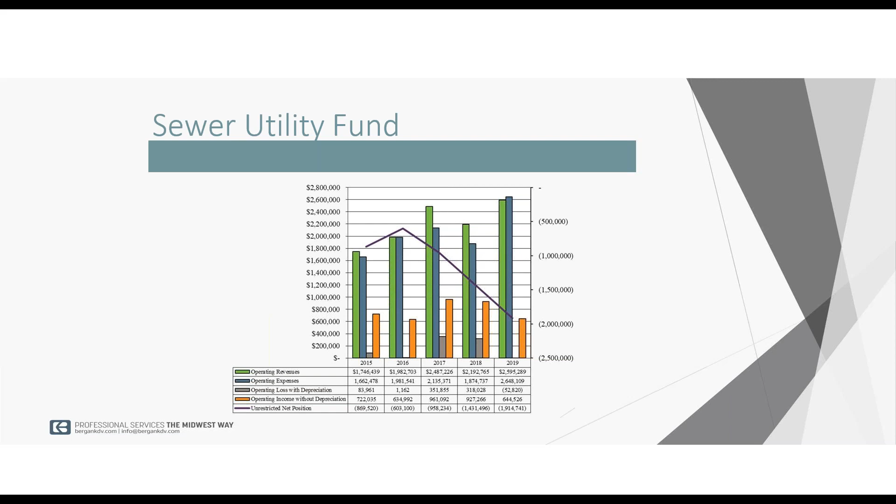And again, not raising the alarm bells or anything like that at this point, but just want you to be conscious of the fact that if that is going to be a significant resource for your general fund in future years, we want to make sure the health of this fund is sufficient to provide that resource for you moving forward.

And then finally, to wrap things up, do we have one other? No, that's it. That was the last of the utility funds that we wanted to cover. So again, I appreciate the opportunity to work with the city.

I know you're in very good hands with Zach and his team. We had a very good conversation with both Jasper and Zach a week or two ago and shared some of our thoughts a little bit more in depth. We've covered 5 or 6 of the city's funds here tonight.

There's about 20 or 30 of them that are out there, and we've had good discussions on a lot of those last week. Again, appreciate the opportunity to give you our perspective and appreciate taking our message to the PBC committee to kind of plot strategy for future years. Be happy to stay on the line if you have some questions about the city's finances or the audit results or anything that I didn't cover in the actual presentation.

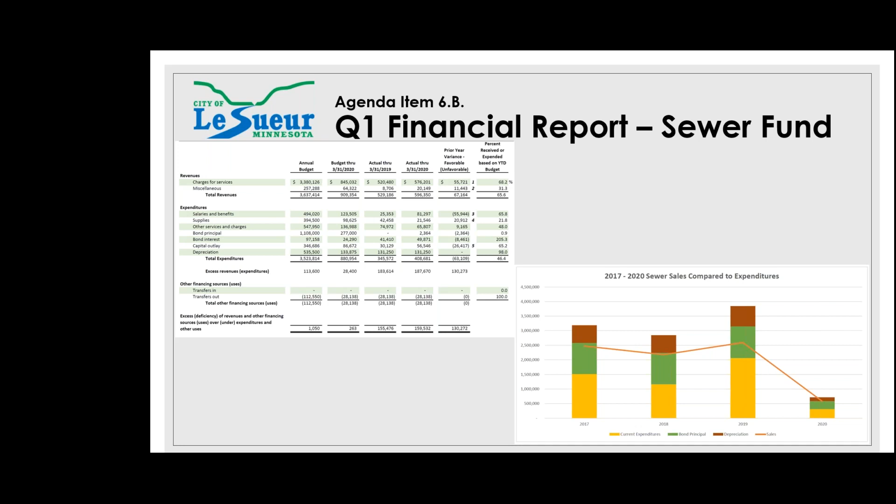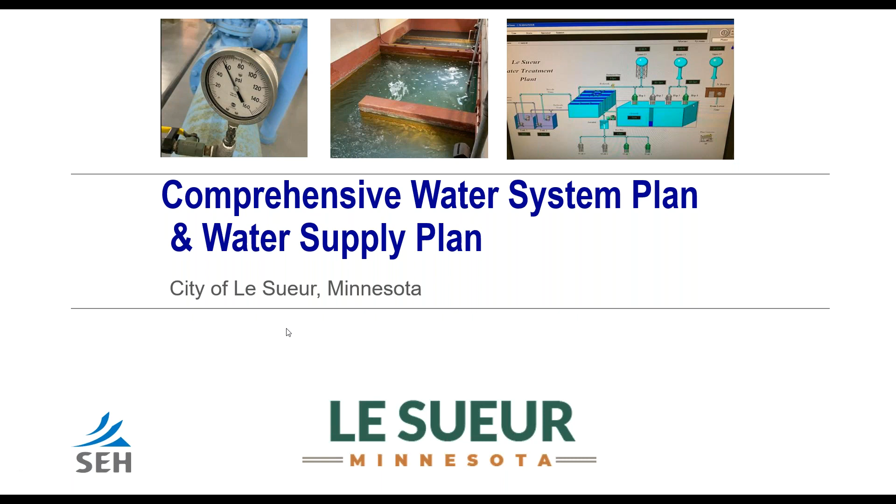Welcome, Mr. Katzenberger. Thank you, Mr. Mayor and council, happy to be here. Thanks for the opportunity to present this report and make this presentation. As you noted, the report itself is quite lengthy, so I tried to boil it down and give you the high points in this presentation, and I'll try to keep it moving along so we can get through it in decent time.

This water system plan was put together for a couple different reasons. Number one, the DNR requires municipalities every 10 years to create a water supply plan and emergency response plan, so part of that was populating a report templated by the DNR. And then, to a greater extent, we've developed a new comprehensive water plan for the city that takes a more holistic look at the overall system, what you're going to need for future water supply, treatment, system redundancies, and all those sorts of things so you can better plan in the future.

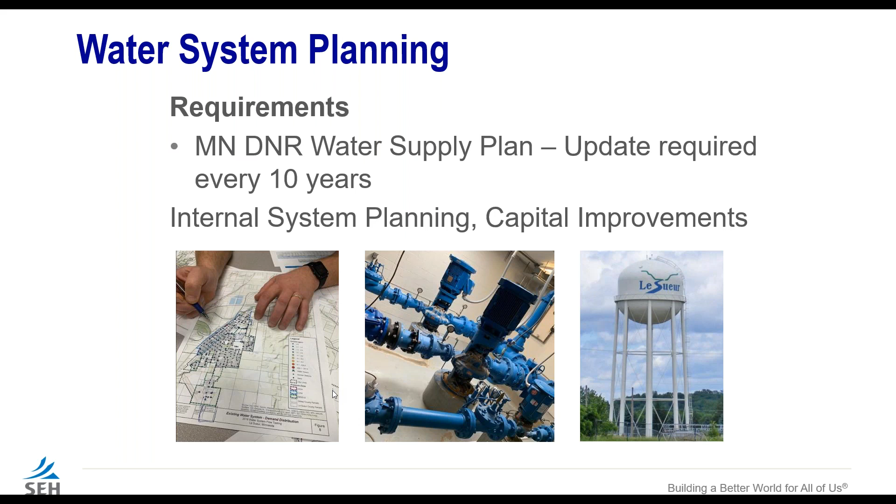What I'd like to review tonight is a few things: purpose of the plan, a look back at historical studies, your current water use trends, your future water system needs, how we came up with those needs through water model development and analysis, and most importantly, what those overall needs look like and what the recommended improvements look like from a future improvement standpoint.

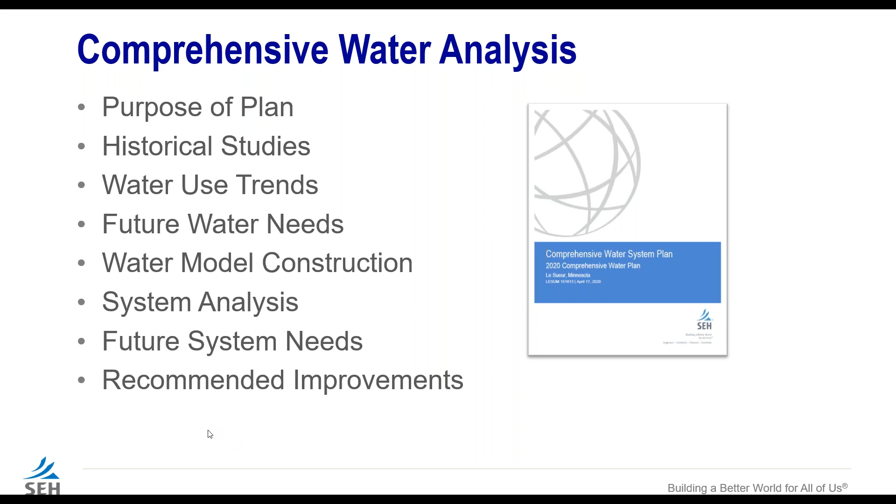We take a step back and look at lots of data, whatever we can get our hands on - previous studies, all the great data your city staff collects - and bring it all together to look at the whole water system from a holistic perspective. As we work through that, we're building upon previous plans and efforts, optimizing and focusing on how the system should change to meet your future needs, both from an existing customer viewpoint and to accommodate additional growth.

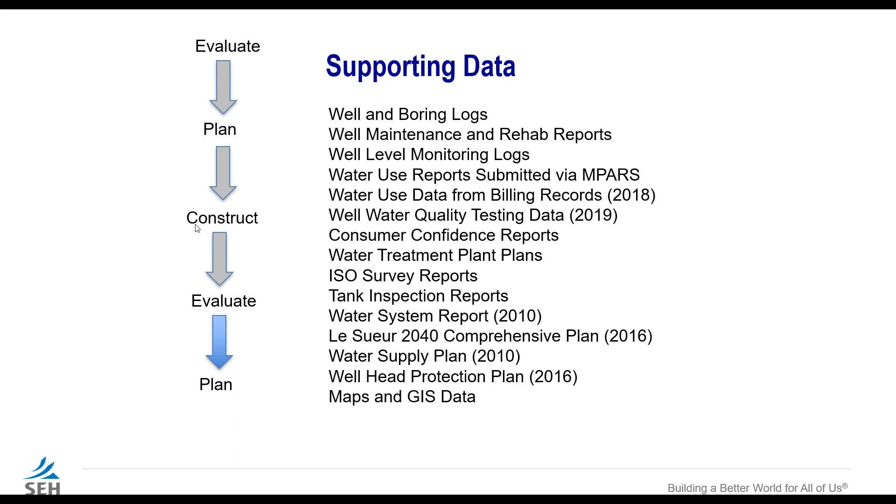We take a look at every aspect of your water system. We start with supply and treatment - how much water do you need to supply both now and in the future to meet your peak days? Storage for emergency supply and fire protection. And then, of course, distribution and transfer - how are you going to deliver water to your customers? Where are the weak points, including from a fire protection perspective?

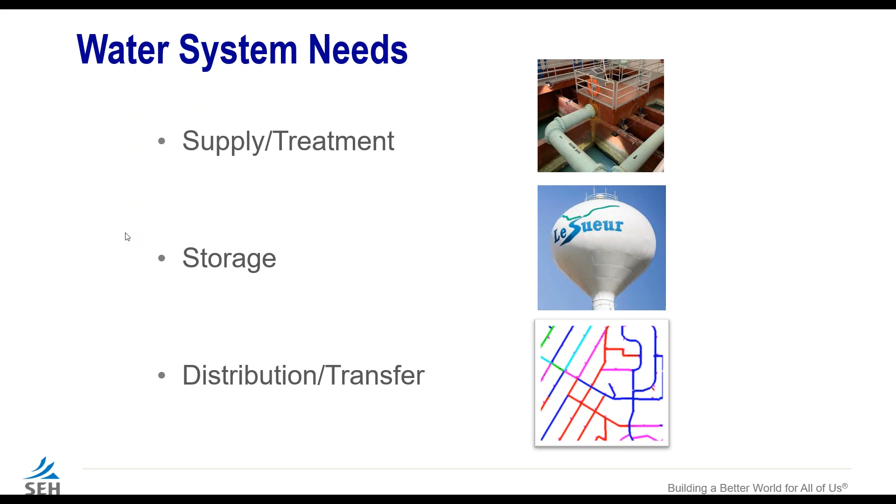Just a quick overview of your water system. Water is supplied through four primary wells - two somewhat shallower wells that tend to be a little more potentially vulnerable to outside contaminants, and two deep wells, which are your big producers and are well protected with lots of confining layers. All four pump to your water treatment plant.

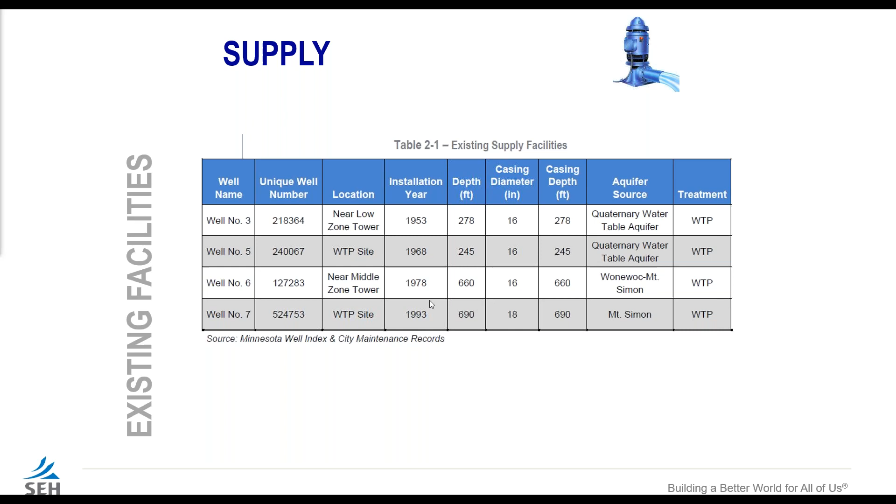The water quality from your water supply wells is generally good. The main issue at hand is levels of iron and manganese in the water, and that's the main purpose of the water treatment plant - to remove that iron and manganese.

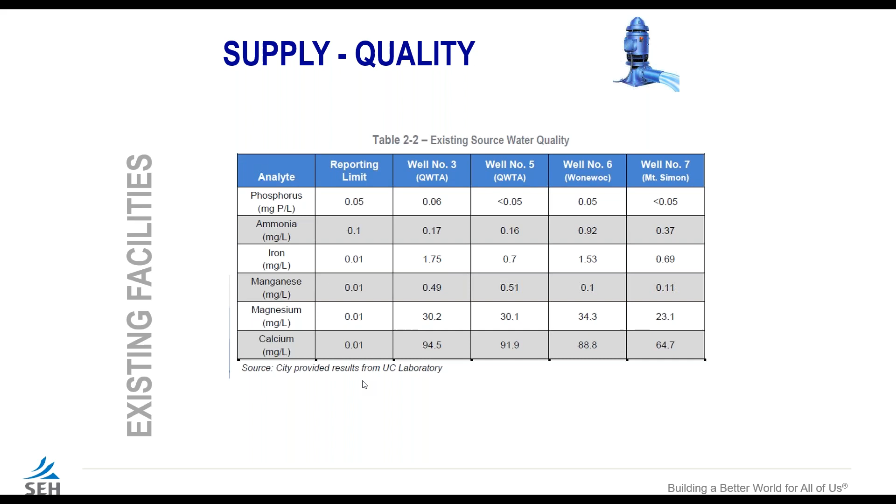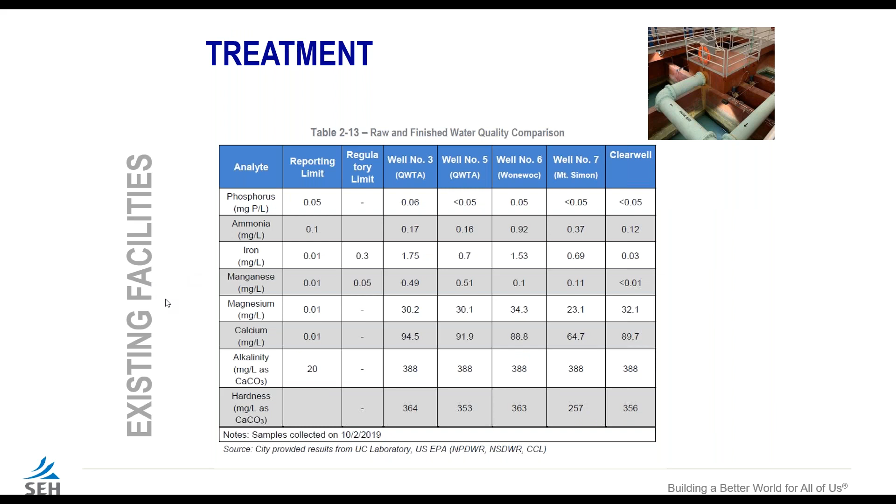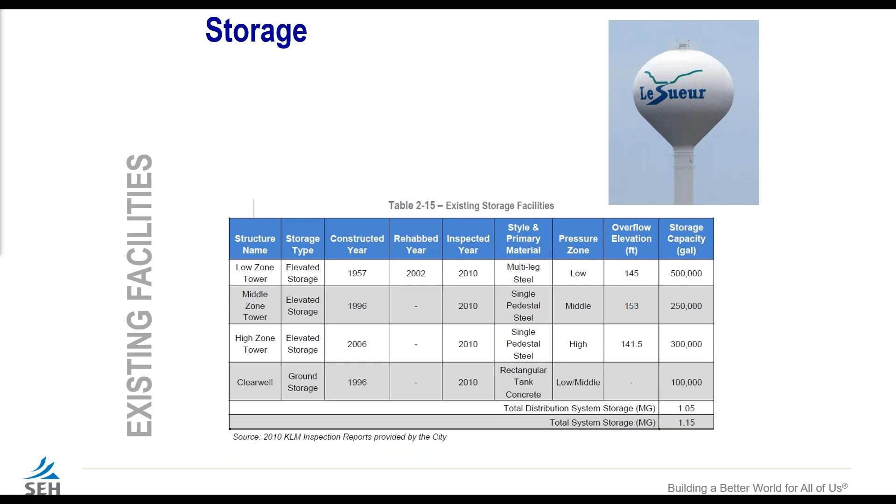From a water storage perspective, of course, the most visible piece of your water system is your water towers. There are three elevated tanks, one for each pressure zone, which serve to provide emergency reserve and also sustain system pressures for the various elevations throughout town. And your distribution system has just over 36 miles of piping, which delivers water to your customers and supports fire protection.

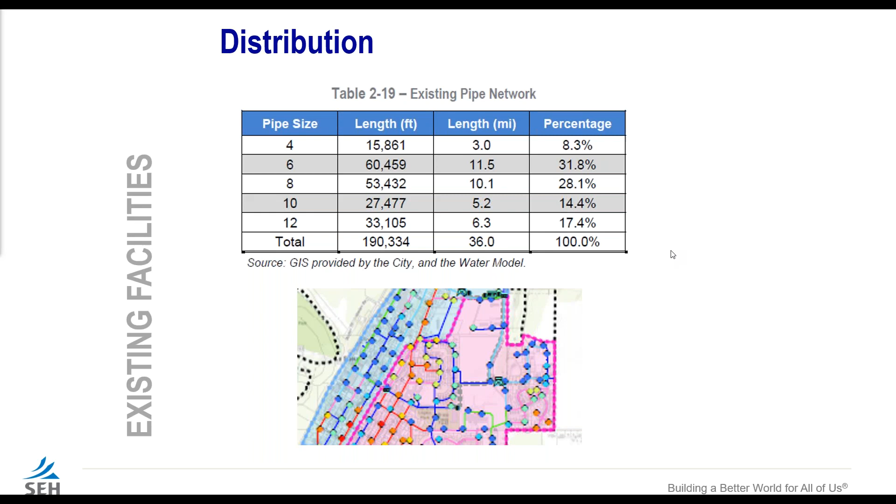This is a review of your pressure zones. These are served by each of the three water towers, really based on land elevation. As you rise in elevation from the river bottom, each water tower that serves a particular area needs to be a little bit higher in elevation in order to support system pressures in those particular areas. So that's really driven by elevation and geography.

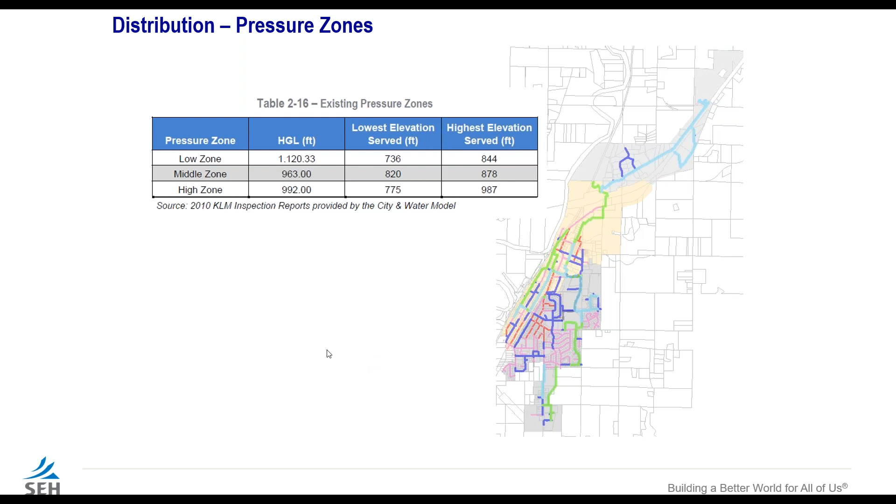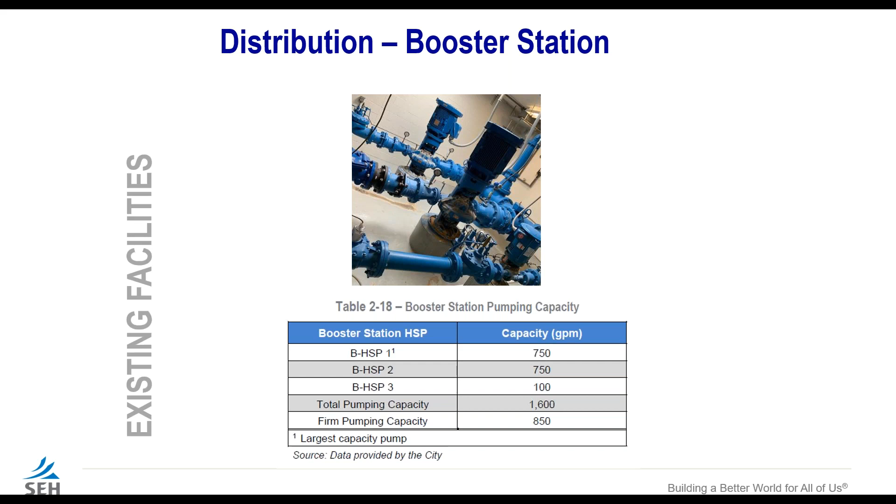One booster station currently exists in your distribution system, and the primary purpose of that booster station or pump station is simply to move water from your low pressure zone to your high pressure zone, whereas the other two pressure zones - the low and the middle zone - receive water directly from your water treatment plant via the high service pumps.

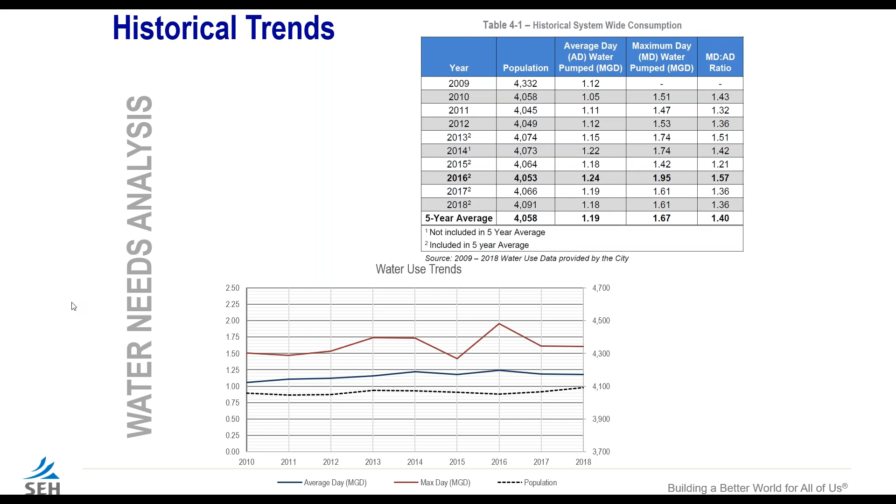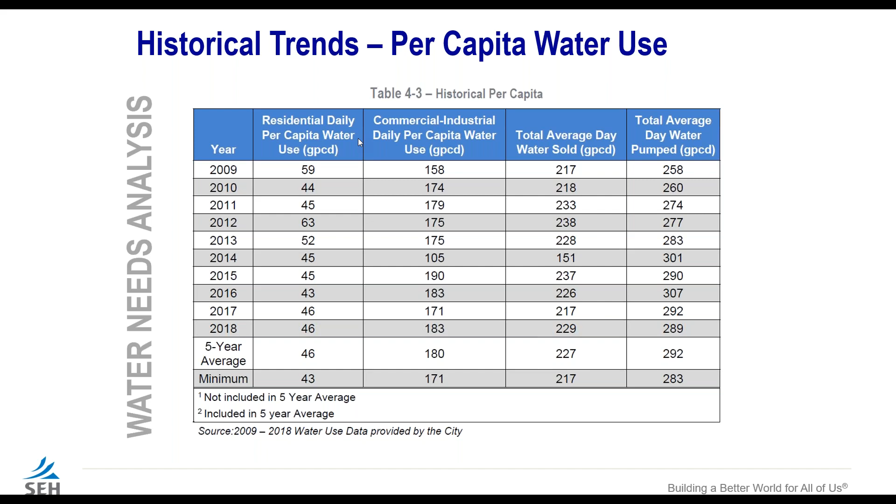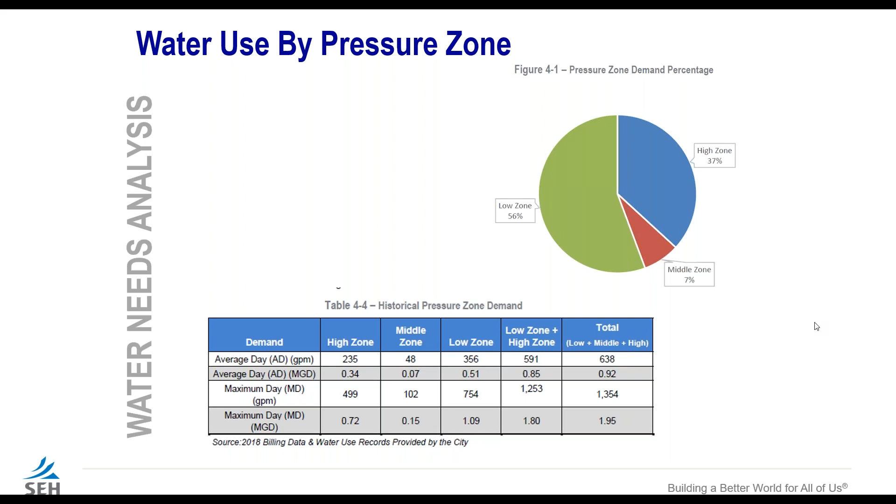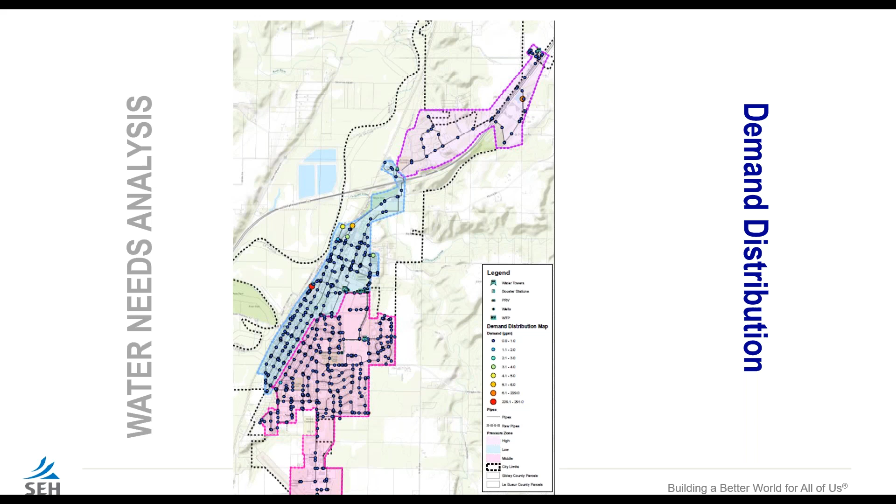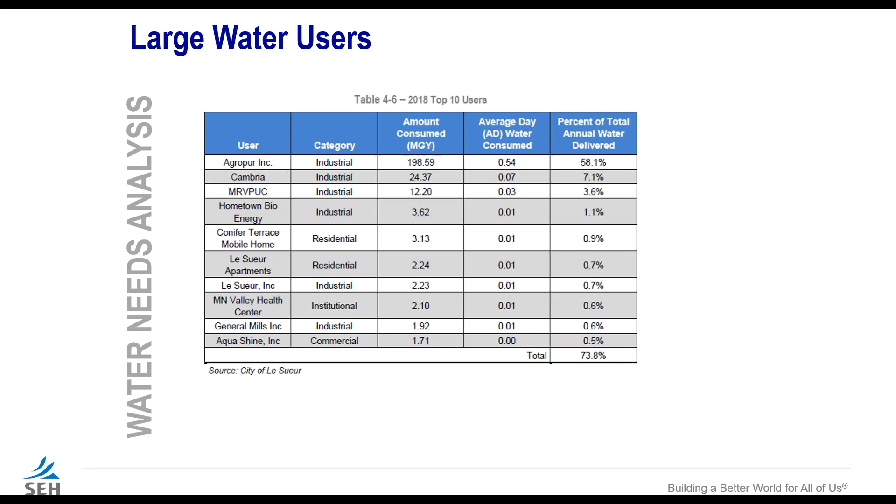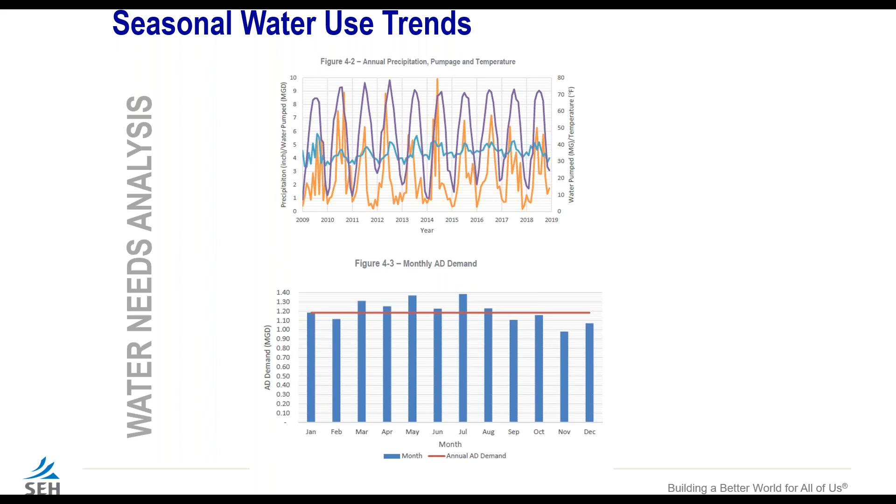Generally speaking, we look at this as having somewhat of an effect on your potential max day water use. Next slide.

We take what we learned from the historical water use analysis and population, and now we project that information out so we can get a feel for what we might expect for future water demands, both from an average daily and a max daily perspective. Now this is based on population, and why we do that is we don't have a crystal ball. We don't know exactly what's going to happen in terms of the change in user types, but we need to have a target or a guideline to shoot for. So we take your overall per capita water use from both the residential and commercial perspective and apply that to your future population projections so we can get a good feel of what's a reasonable amount of growth.

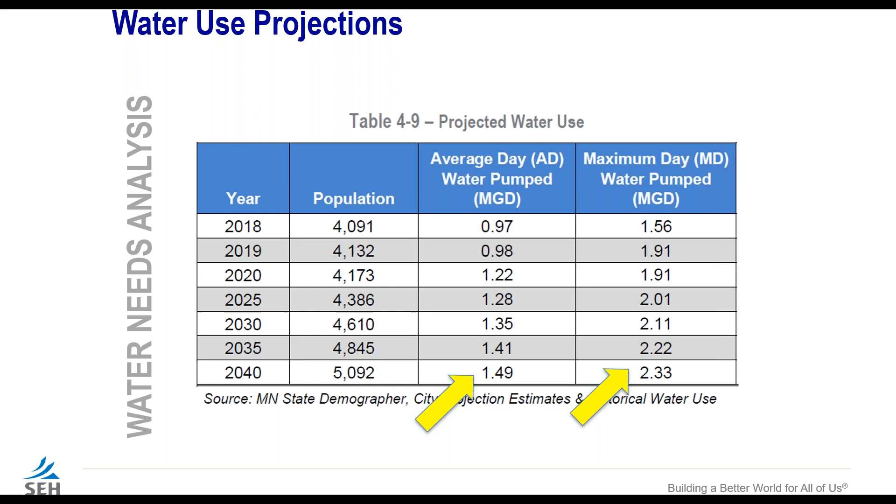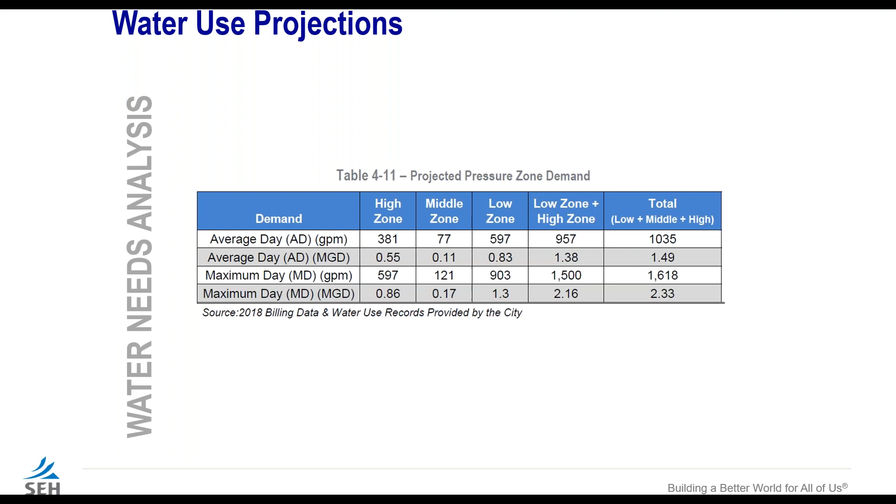All right. Next slide. This is just a quick breakdown of how that pans out by our pressure zones, and this really comes into play when we look at things like water storage on a zone-by-zone basis and high service pumping into each pressure zone. Next slide.

So now that we have something to shoot for in terms of potential water system demand, we can take a look at what our current needs and projected needs are. Our demand-driven things are things like supply and treatment, storage, and system pumping. We also developed a water system model, which simulates the operation of your entire water system, so we can look at how things are currently performing and how things may need to change from a supply, treatment, storage, and system pumping operations perspective. The big thing the model helps with is transmission and distribution, understanding potential weaknesses throughout the distribution grid.

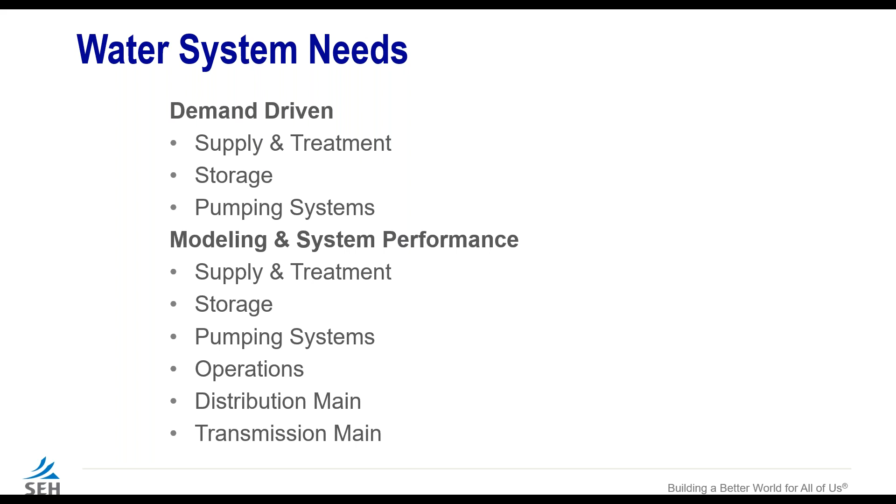We can go on next slide.

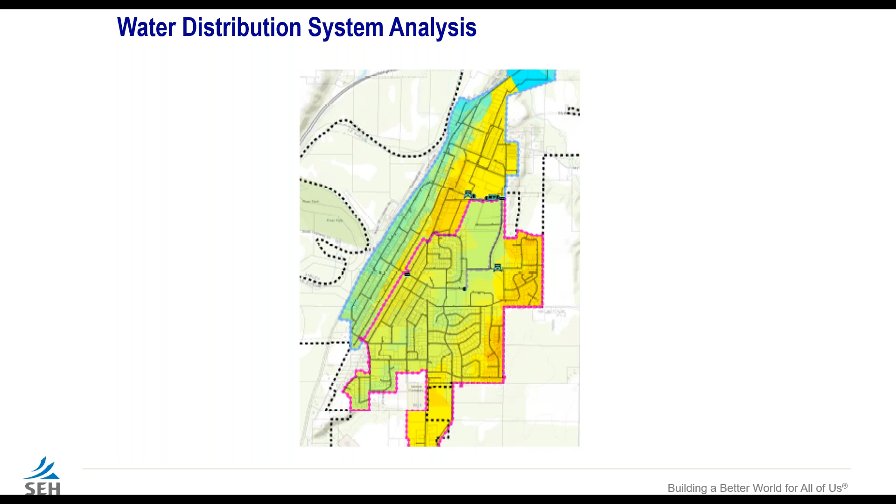As we developed our distribution and holistic water system analysis, we developed a computerized water model where we take your existing water system mapping, piping, those sorts of things, and bring it into the modeling environment. We go on and do some field testing, bringing back information throughout your distribution system so we can understand what your system can do in terms of flow performance and pressure performance, and correlate that in the model. Then we simulate those same tests in the model and calibrate it so our results match our field results.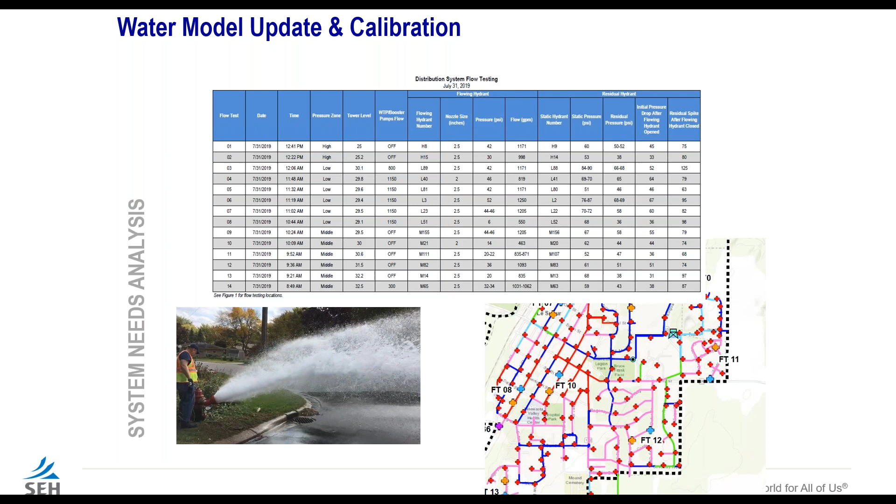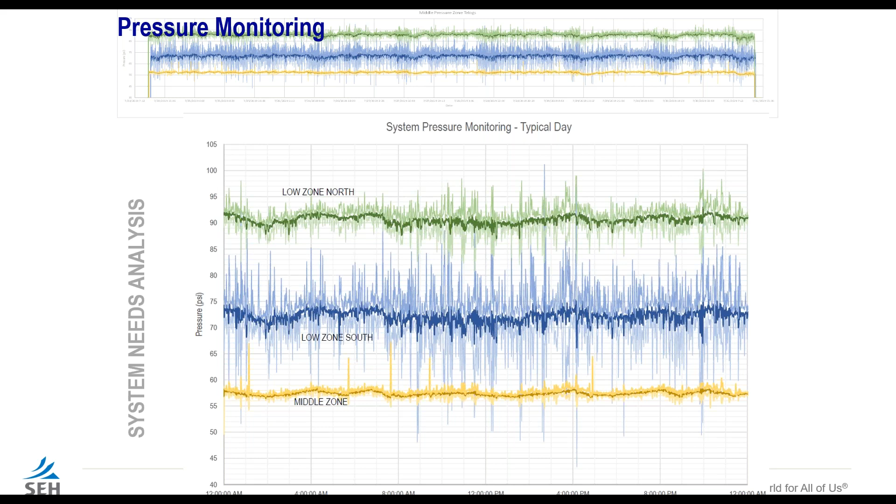And I'll have to apologize here - my computer went to sleep on me. I've got to see where I'm at on the slideshow here.

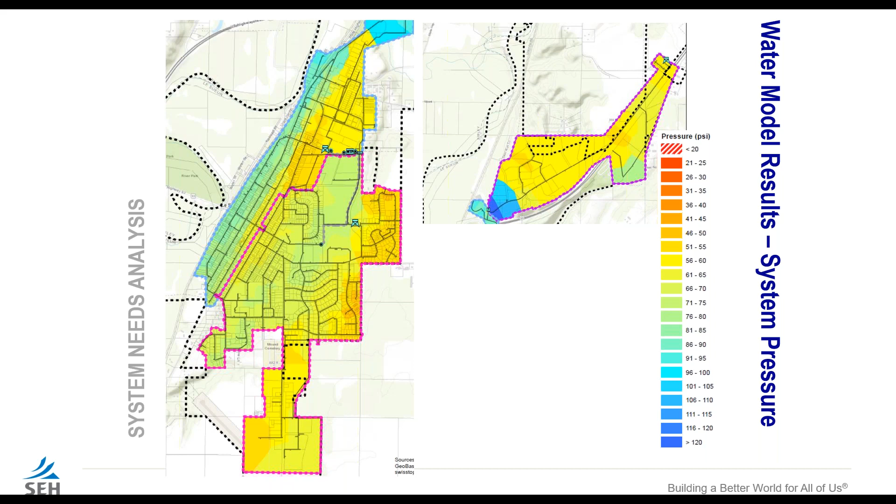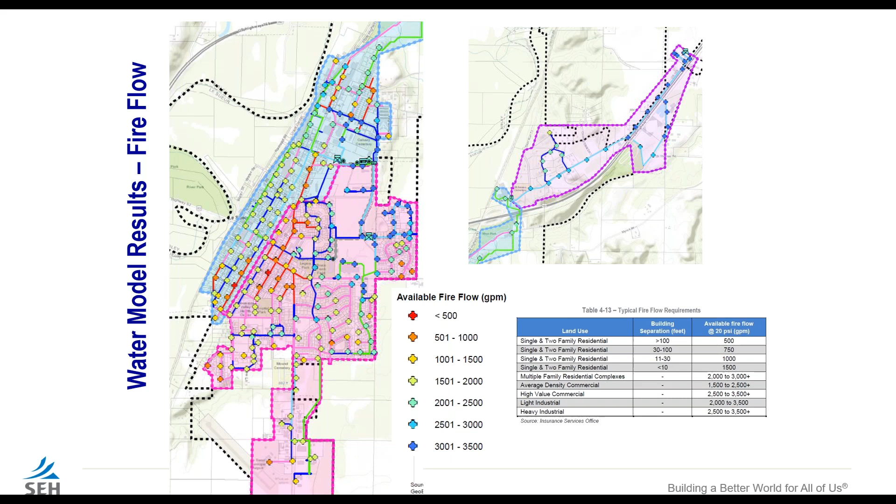This grades your water system based on fire flow ability among other things. This gives us an idea of where there's some weaknesses in the distribution system, where things could be improved from a pipe size perspective, as well as some redundancy between pressure zones. That will come into play in our future recommendations, and some of those have already been implemented with the Trunk Highway 112 turnback project, right-sizing some piping along that improvement to bolster the fire flows and provide some redundancy. Let's go to the next slide.

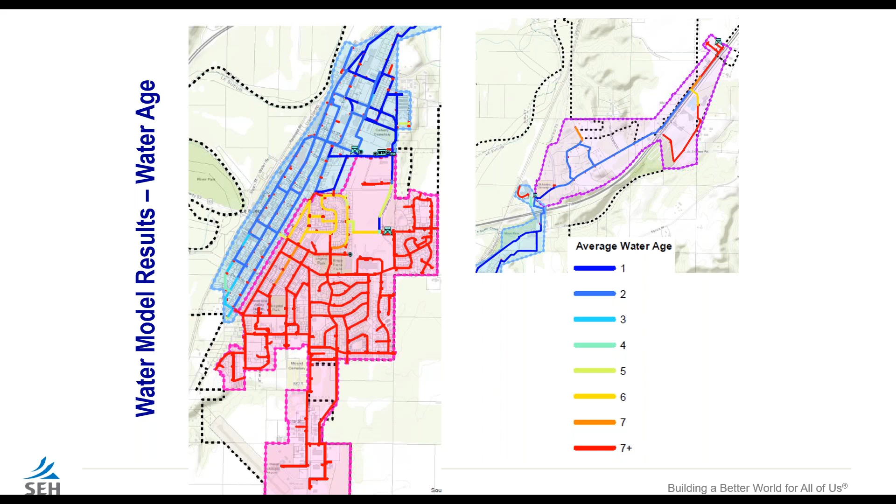You'll notice a lot of red piping in the middle zone, and that's really a product of that being a lower use water pressure zone. So just the amount of piping versus how much we use in that zone, it's going to take longer for water to go from A to B, because not that much is being consumed compared to the other two zones. Let's go to the next slide.

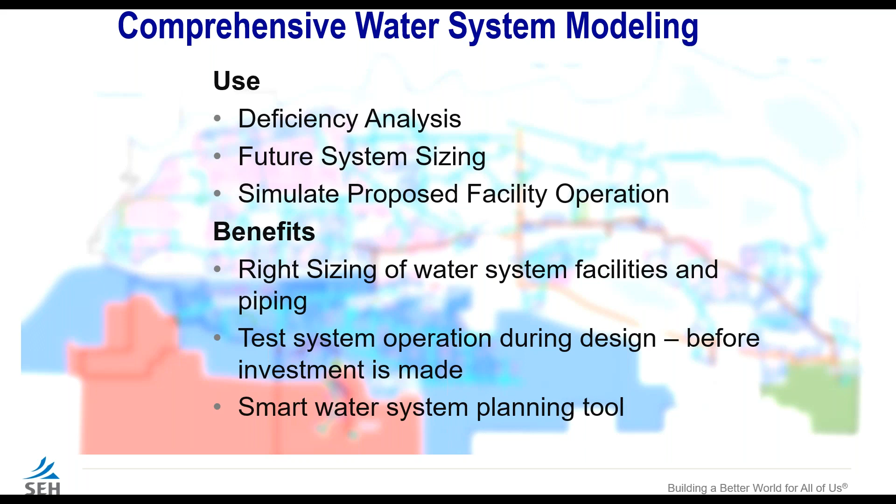When we look at the modeling, we use it for deficiency analysis, finding weak points in the system, sizing future facilities, and then we can simulate proposed facility operation and make sure that what we're recommending is actually going to work and provide the benefit that you're looking for before you make the investment. We can test your system as a before and after operation with each improvement. We can go on to the next slide.

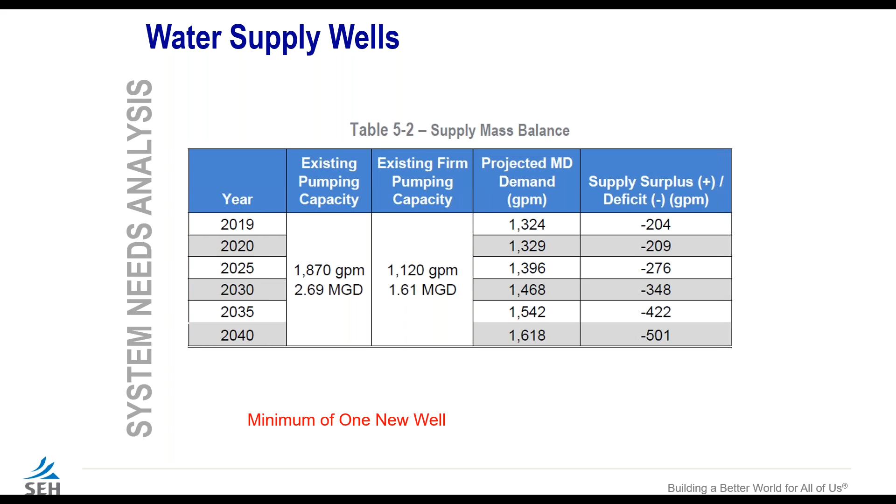Let's say this July, if your largest well were to go down and you had a massive day of water use, your storage might start to get depleted because you can't make up that extra 200 gallons a minute you're short from your production rate. This gives us a feel for whether we're already potentially short with supply, and what that shortage looks like in the future through 2040. So right off the bat, we can add to the column of potential recommendations a minimum of one new water supply well to meet future and current maximum day water demand from a firm capacity perspective. Go on to the next slide.

Similarly, we've got our water treatment plant, and we need to send our well water through the plant to remove the iron and manganese so you can have a good end product for your customers. We take a look at what is the true production capacity of that plant, what it was designed for, and how it's currently being operated. Just a takeaway from this is that the plant had a previous potential peak max day demand, or a peak operation, of 2.5 MGD, 2.5 million gallons a day.

Currently, the way the plant's operated and functionally, we're tapping out at about 1.6 million gallons a day, or 1,200 gallons a minute. One thing going on there is that the original plant design was to feed permanganate to address the manganese. Since then, the plant has been operating without the permanganate and operating biologically, which is a good way to reduce chemical cost and treat your water. But currently, the production capacity is limited by the treatment processes in use.

There's a question of how do we get to that larger capacity? Can we reach 2 million gallons a day? Can we reach 2.5 million gallons a day? Part of what came out of this was recommending a pilot study to address those future treatment capacity concerns.

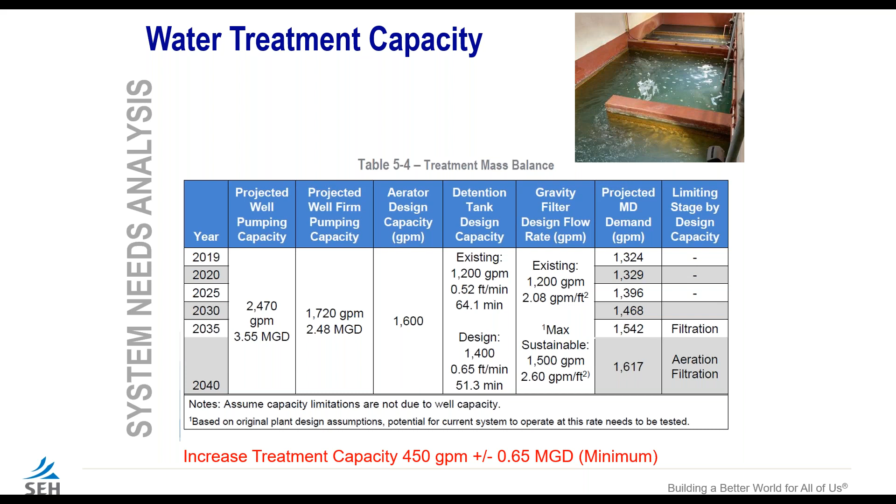Water storage. It's probably not a secret that overall your water system's been short on water storage, and there's been lots of discussion for years about potentially adding more storage. We're just verifying that with our calculations through a couple different sizing mechanisms. I won't bore you with the details, but we're looking right now at

recommended additional storage of 200,000 gallons, and then through the 2040 planning period another 400,000. Now, storage tanks, depending on how you build them, usually come in nominal capacities, so we're recommending a nominal increase of 500,000 gallons. Whether you do that in a new tank, or as we recommend later in the report, decommissioning an existing tank and building an entirely new tank, combining capacities of the one that's removed.

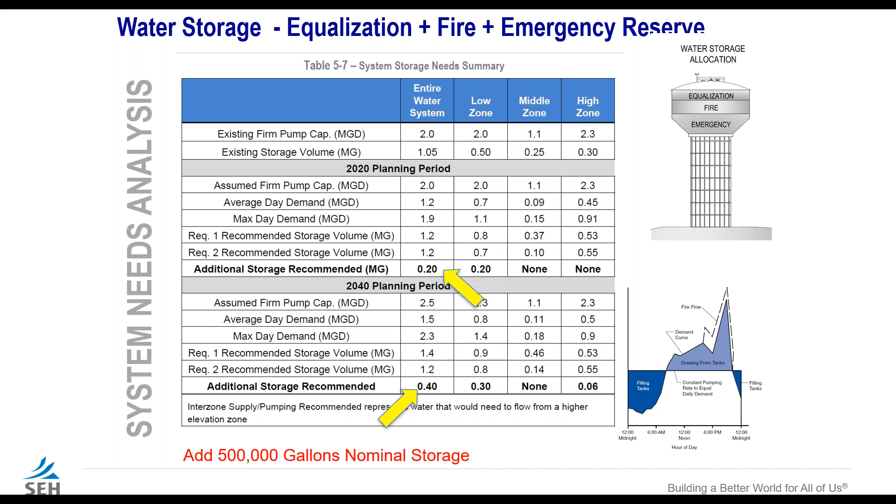And then overall, with the model and other tools, we take a look at other potential system needs. One major takeaway is your high pressure zone redundancy. Currently, that is somewhat handicapped by one supply main through the booster station. If that supply or discharge main goes down under the highway, or anywhere between the main grid and the high zone, the whole zone's without water supply.

So that's a major concern. In similar fashion, not to the same extent maybe, but the middle zone has basically one pipe from the water plant to the distribution system. So taking a look at providing a second level or second layer of supply to that middle zone is an important piece.

And then pressure zone system connections. Each pressure zone operates independently pressure-wise, but you can link the two different pressure zones with either a check valve or a pressure reducing valve, so that they can help each other out every once in a while, primarily for fire flow. We've already got one planned in with the Trunk Highway 112 project. That's going to provide a big benefit in terms of fire flow in both directions, and it's really going to supplement the pipe size upgrades.

And then talk a little bit about pressure sustainability, circling back to the pressure monitoring graphs that I had shown. What are some things you can do to quiet those system pressures down a bit, from a storage perspective, hydropneumatic tank, and distribution perspective.

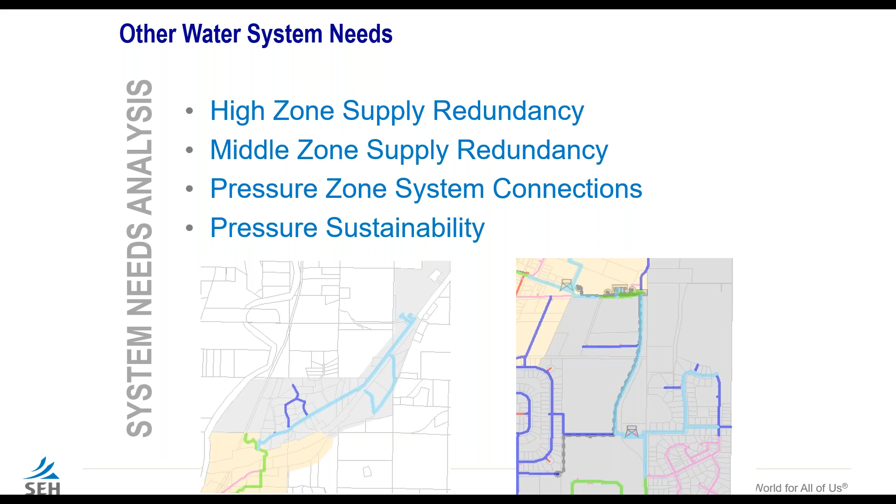So we want to come up with a comprehensive list of options and alternatives, and we could kind of develop alternatives and possibilities until there's no end, but we wanted to limit it down to some realistic possibilities so we can compare apples to apples from a cost perspective and performance perspective.

Generally speaking, we've got these alternatives laid out as a group of projects that would be alternative A, or a group of projects that would be alternative B. In some cases, the recommended improvement would land in both alternatives.

In general, alternative A versus alternative B really circles around the option of either providing system redundancy and expanding system capacity at your existing water plant and adding a new well and treatment plant capacity at your existing facility, or alternative B would be taking a look at an entirely new geography to add 2 new wells up in the high zone and a second water treatment plant. If you do that, that affects how we look at water main redundancy to that high zone, whether or not you need a supply main or another booster station. So we wanted to set those against one another to see what that looks like from a real cost and performance perspective. Right on down the line, I'll quickly review these different alternatives.

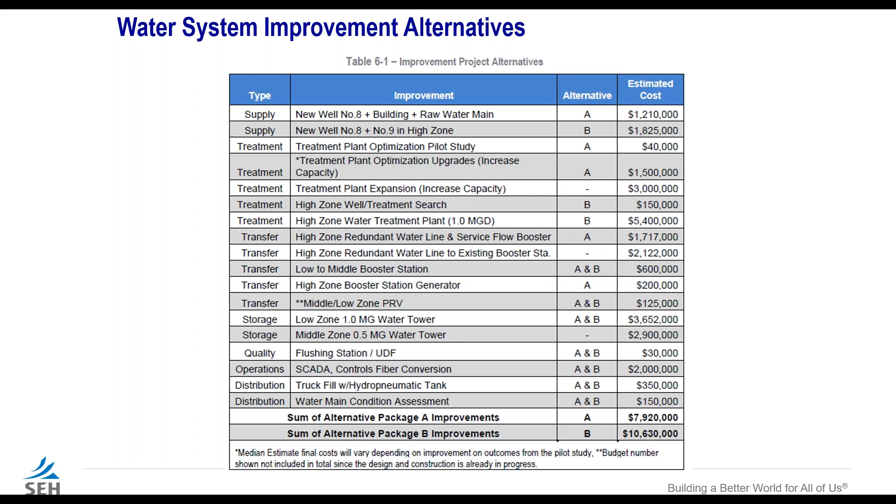So that really informs the next slide, where we settle on Alternative A. This is a graphical representation of those potential improvements that we think make sense, initially to serve your immediate needs as well as your long-term needs through 2040, with a reasonable amount of water system demand growth.

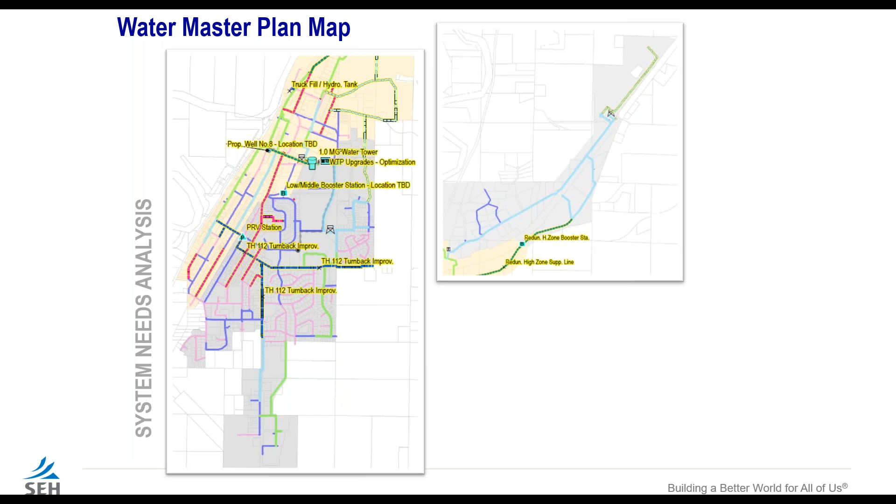Taking a look at performance, I alluded to the water model, and what do you get for an investment? What's your return on investment? So we can take a look at a few different things, the before and after of the water system.

This takes into account water main upgrades, a new storage facility, and some links between the pressure zones. We can really see a net result in our fire flow availability, which translates to better flow and better redundancy throughout your distribution system. I just threw this in as a quick example; if you look in the report, there are other simulations comparing the existing system and future system from a hydraulic perspective.

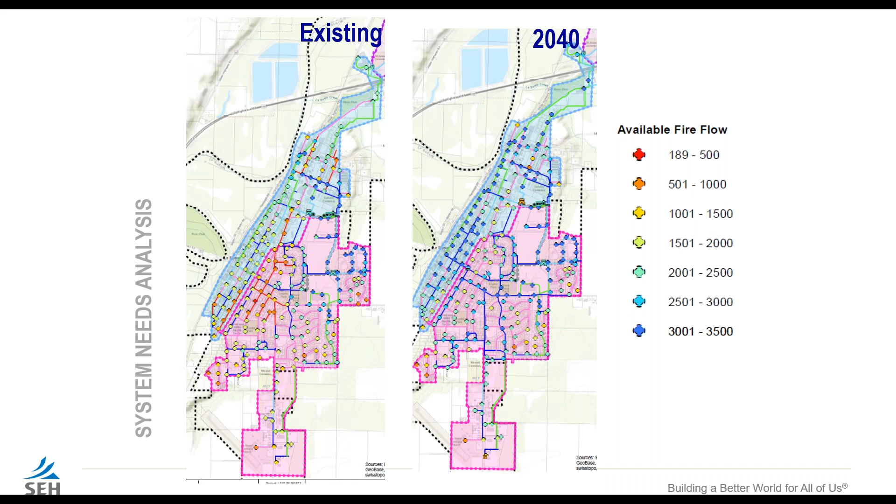And then the next slide takes those priority project improvements - primarily those projects that landed in the A column - and we ordered them in a way that seemed logical in terms of priority, what you might look at tackling first.

So the first one that lands on the table is the PRV station, which I believe is already in progress or may even already be bid out, on the 112 turnback project.

And then the next project that really makes sense to pursue is that low zone water tower - finding a spot for a new 1 million gallon water tower, getting it online, and decommissioning the existing 500,000 gallon tower in the low zone. That'll give you extra capacity and reduce your maintenance costs.

Newer tank styles, depending on what you go with - if you were to build a 1 million gallon composite tank, half of that tank is concrete and doesn't have any coatings on it. So then you're only maintaining the coatings on the tank portion of the water tower. That's looking like maybe the first big project to tackle.

Parallel to that, we want to start looking at solving the supply and treatment capacity issue. The first step would be that treatment plant optimization pilot study I talked about, really digging deeper into the treatment plant process to understand how the water plant is performing, what its weaknesses are, what's the useful life left on the filter media, is the filter media the potential bottleneck in that plant.

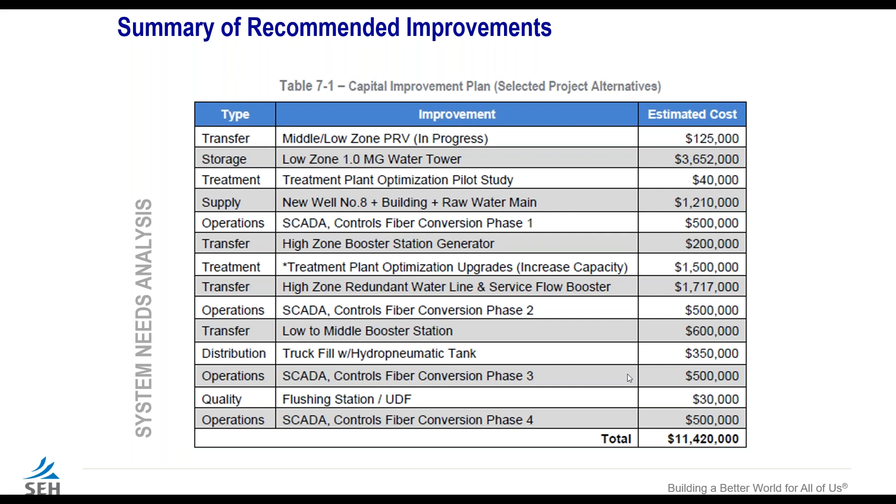Again, that's a fairly comprehensive list of projects over the 20-year planning period. The concentrated projects that are probably of greatest need land earlier in the list rather than later. We can go to the next slide.

So if we take a look at that just from a simple next step perspective, what comes next after we've looked at everything?

The first phase would be water tower planning, taking a look at possible sites and locations for that new low zone water tower. We think it would be situated nicely, not too far from the water plant, and very near the existing water tower. There are some connection locations to larger diameter water main that might facilitate that future water tower construction well, given land is already owned by the city.

And then pursue funding and figure out the mechanism for how that's going to be done. At the same time, that water treatment plant capacity optimization is really going to be the roadmap for how you might choose to proceed with your supply treatment question.

If we can find a favorable alternative to optimize what you already have, you're going to be able to more economically increase your treatment plant capacity and then justify the addition of that new well, which would be located near the water plant. Part of that work would be finding the right spot for that new well based on land ownership, potentially seeking out parcels already owned by the city not far from the water plant, and far enough away from the other wells that they wouldn't cause potential interference.

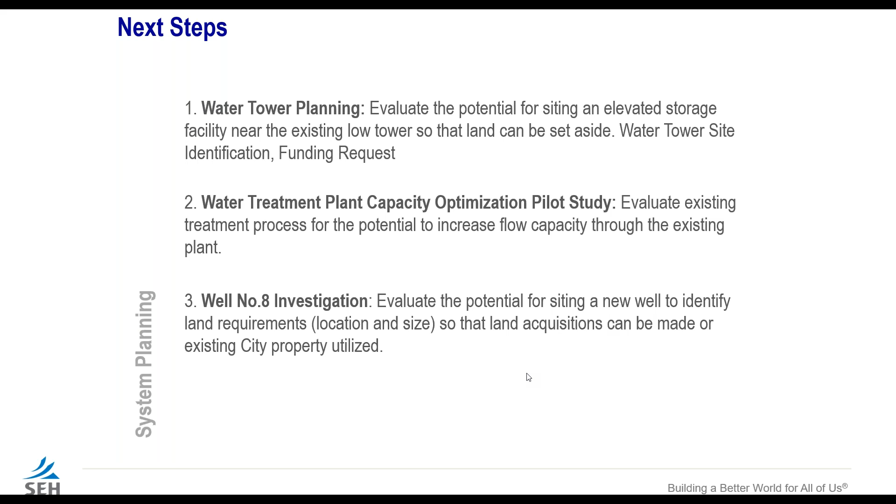Fair enough? Okay, with that said, I'm going to request another 5-minute recess before we move on to 6 Delta, our 5-year street maintenance plan.

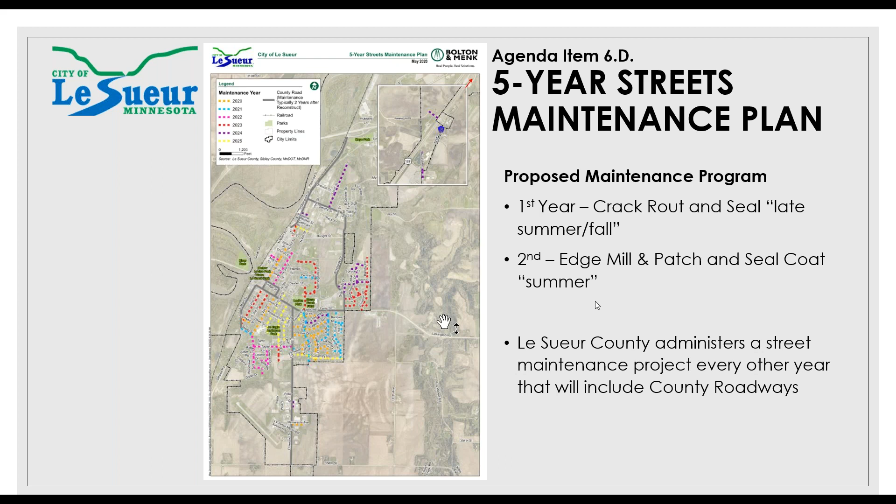Thank you. So we've got each year then broken out in the maps, and I'll go through these relatively quickly, being that they're included in the packet.

So we'd be starting in 2020, targeting a fall timeframe in this proposal, beginning with that first phase, the crack rout and seal. We'd be focusing on the project that just underwent construction here in 2017. North 2nd Street should be very, very low on cracking, if at all, but South Main Street will experience some, being that it was a mill and overlay in nature, and there is some cracking evident there. So we're trying to get on top of that in the shortest order possible.

And then really beginning our first quadrant or neighborhood of maintenancing, being the Park Lane inner drive area. So we have a project total of just short of 15,000 for that initial crack rout and seal. Next slide, please.

And then here you start to see the development of really this annual program. So following up in 2021, we would undergo a seal coat of the roads that were crack routed and sealed the year prior, or that fall prior, and then establish the crack rout and seal of the next grid or neighborhood of streets, still focusing in that same area, just expanding on that length.

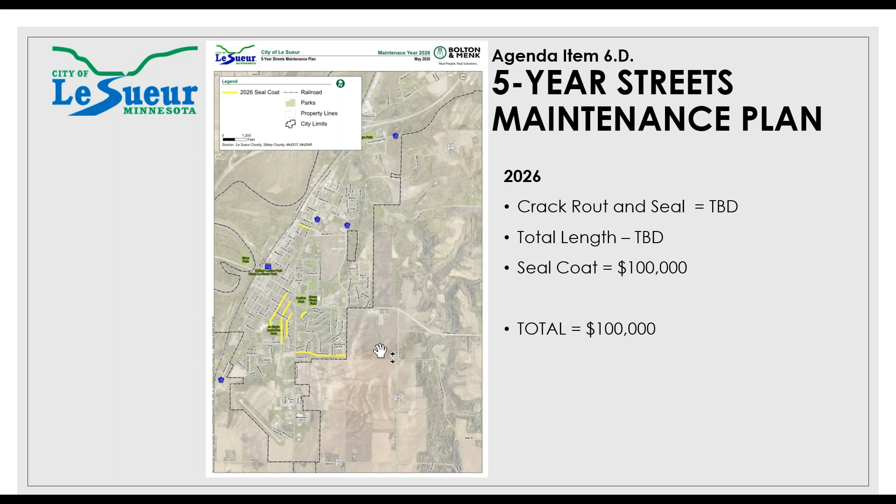So the next slide, please, Jasper. So then kind of the power, I guess, of the plan. So over a 5-year total with this plan, the maintenancing plan that's being proposed. And the strategy with maintenancing is to identify streets that have not failed to a condition where it still warrants investment. It's really finding that opportune time to invest and prolong that pavement life to the greatest extent possible.

So it's roads that have solid utilities under them, and roads that aren't failed to a condition where you're wasting or throwing away your money. And so in the development of this plan, that's the roads that we are targeting.

The total length of streets maintained within this 5-year window is a little short of 12 miles. And then overall, of total local city streets, over half of those would be maintenanced in this 5-year plan. And then really fixating on that average we talked about, around that 150 to 160,000, which we'll expand on more on the 26th, but that's in conjunction with the reconstruction, the 10-year streets and utilities plan. It's really focusing on that budgeted amount annually that we're going to be investing in the utility and street infrastructure, hitting that annual target for budgeting purposes.

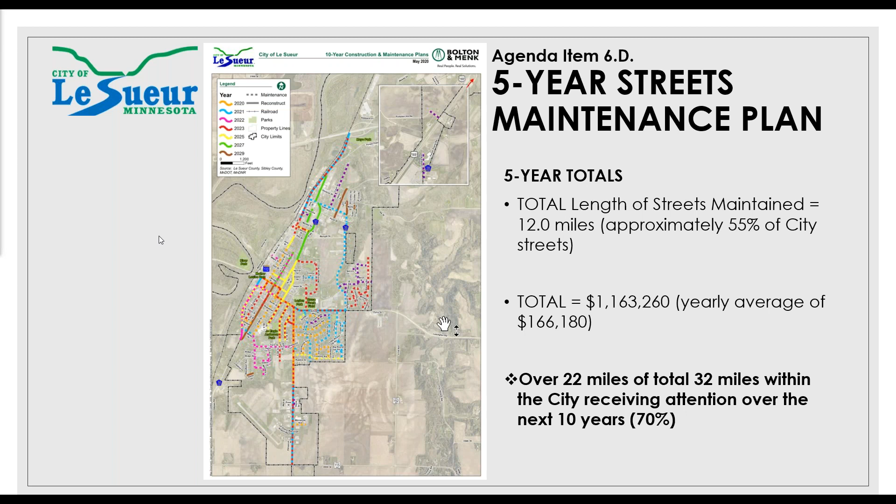Well, again, we are asked to participate in the presentation, which I believe we have. There's no action required for this item. But we're going to go ahead and revisit this at the May 26th, 2020 City Council meeting to talk not only about this, but also our entire 10-year capital improvement plan. So with that said, I'd like to go ahead and extend thanks on behalf of City Council to Engineer Bienfang.

And with that, we will now go ahead and move on to our next agenda item, which is 6 Echo, our 2020 sanitary rehab award contract.

City Administrator Krugel: Mayor Hague, members of the City Council, before you is a project that we've identified as a need to basically maintain our sewer service in a section of town, the South Main area. City Engineer Cory Bienfang will give a presentation on this, and what we're looking for is approval to accept a bid or quote that went out for this project. So with that, Corey, I'll turn it over to you.

I appreciate it, Mr. Krugel. So this is something that was in the CIP approved for 2020, and it's really a two-part piece. I'd like to clarify that the city has been broken into 4 quadrants, and annually one of those quadrants is televised, with the intent that every sanitary pipe within the city is televised every 4 years.

As part of this continuous televising program, the condition of one of the pipes on South Main Street was deemed critical, and that is really what's primarily driving and facilitating the timing of this project. In conjunction with that is the first of an intended ongoing sanitary rehabilitation, consistent with the ideology that not every pipe is able to be replaced, and definitively not every pipe is necessarily needed to be replaced. But to maximize the length of the sanitary system within the city, there are rehabilitation methods that allow for and are able to achieve the greatest life of that utility. So it's really a 2-part piece here that I'd like to be speaking with.

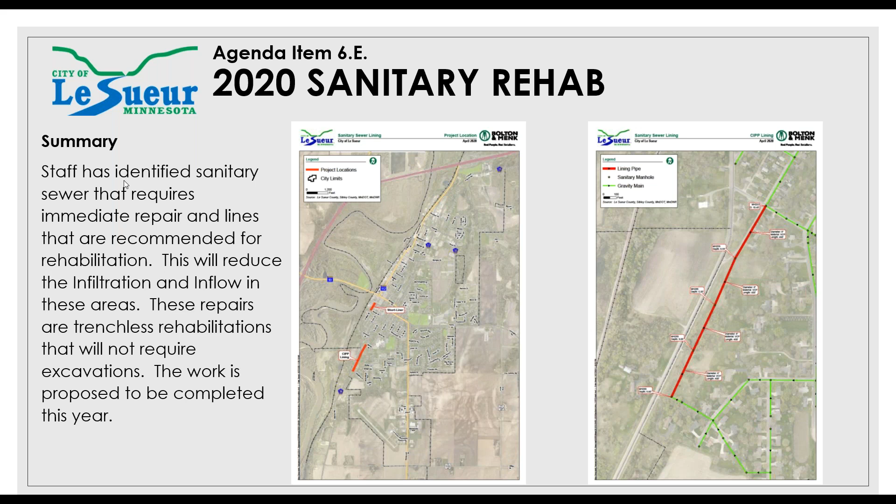So we've identified an area, actually south of Main Street, a portion of sanitary sewer that resides outside of the roadway, which makes trenchless lining a great candidate for pipe like this, since it wouldn't be impacted as part of a street project, and is difficult to replace being outside of the roadway. So we've identified a stretch of pipe that maximizes what's been budgeted in the CIP, and to really launch from here with this potential lining program or sanitary rehab. Next slide, please, Jasper.

What we did for 2020 is we direct-solicited quotes from reputable lining contractors that specialize in this sort of work, and we received 3 quotes back out of 6 that we sought. A couple responded back that either project size or scheduling didn't allow for them to quote. The low quote received was from Hydro-Klean, who are actually out of Iowa. The proposal tonight, or the request tonight, is to move forward with a contract to short line the pipe deemed critical in nature, and then proceed with that cured-in-place rehab. The intent is that this work would be completed by midsummer to reduce the risk of pipe failure on South Main, so we have a completion date of end of July as part of this project.

And I'd be open for any questions.

Okay, just to be clear, Engineer Bienfang, this is Mayor Hague again. The breaks that exist on South Main, that looks like it's basically over there by Canopy, and the other would go from Mag Street to Catalina Court. Is that correct? That is correct. Okay, a little hard to read this, I had to break out my magnifying glass. No, I understand, the maps in the packet should be more informative, Mr. Mayor, as far as the true physical locations and such. But you did observe the project areas correctly. Right, perfect, okay.

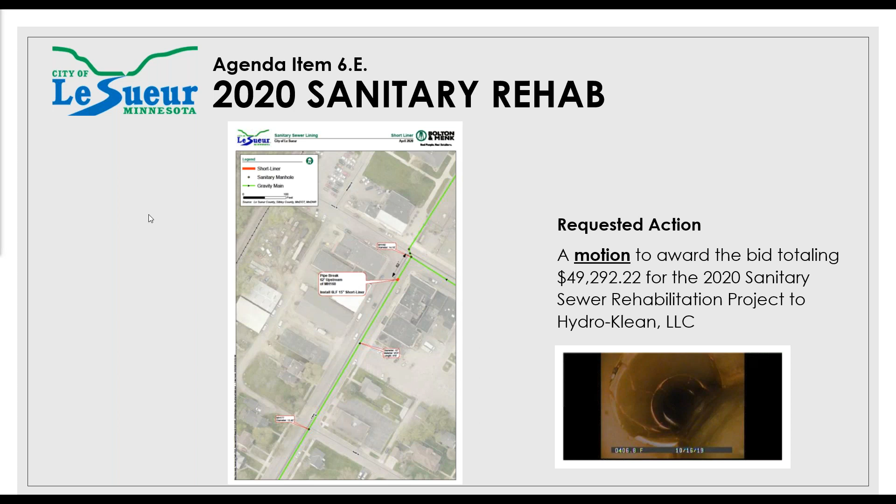Thank you, everybody. We'll now go ahead and move on to 6 Foxtrot, which is the Government Capital Corporation lease item approval. City Administrator Krugel. Yes, Mayor Hague, what you have before you is a payment request form through Government Capital Corporation for the water and electric meter replacement project.

We received some additional electric meters that were on back order on hold. So we received those, and this is a payment just to Core and Main for receiving those electric meters. So what we're looking for tonight is just a motion to approve the execution of the payment request form to Government Capital Corporation.

I'll entertain any questions. What is the status of any back ordered meters at this point, City Administrator Krugel? Public Services Director Kuchera could give you the exact numbers. I know there's a few more out there. This isn't, I don't believe, the final payment or final shipment that we're going to receive. But Rich, do you happen to know what we have left? Yes, there are 54 electric meters on back order yet, and they are scheduled to ship this month.

Ship May 2020. Okay, so we're 100% up on all of our water meters, correct? Correct, Mayor, we have all the water meters, but they are not installed. We are down to 10 or 11 left to replace. We have snowbirds, we had one come back today, one come back last week that contacted us. So we're getting people that are coming back to their houses and getting them installed as they come home.